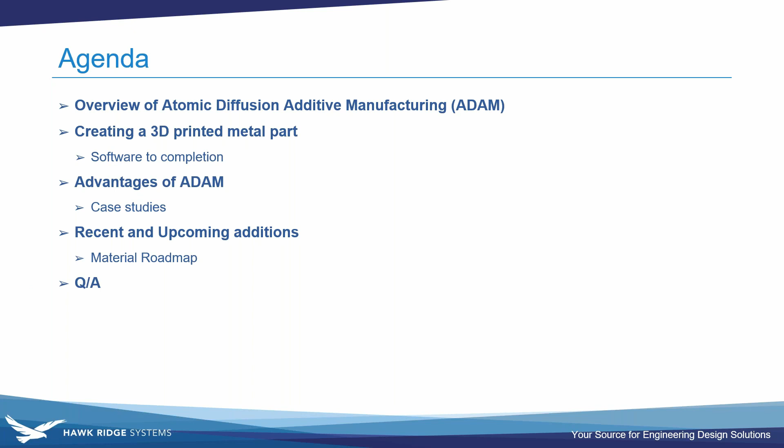So what is the ADAM process? Like with most modern manufacturing methods, you'll first work with your CAD software to design your part or assembly. Once you have your design, you'll export an STL file and upload it to the Markforged Eiger software. Since Eiger accepts STLs, you can continue using your CAD software of choice for the actual designing. Eiger is also really simple to use and lets you customize how your part will be printed. When your part is fully uploaded to Eiger, you can very easily forward it to your MetalX for printing.

The material that creates your part is a filament strand made up of metal powder bound in wax and plastic. If you're familiar with the layer-by-layer printing process of other Markforged printers or any other extrusion-based machine, the process here is nearly identical. If you're reading the print display card, you may notice a note about scaling and shrinking. We'll go over why parts shrink during the ADAM process in the next few slides, but because shrinkage does occur, Eiger scales parts automatically to account for it. The rate itself is about 20%. Since Eiger scales your parts without any needed input, all you or your designers have to worry about is designing your parts with their intended dimensions.

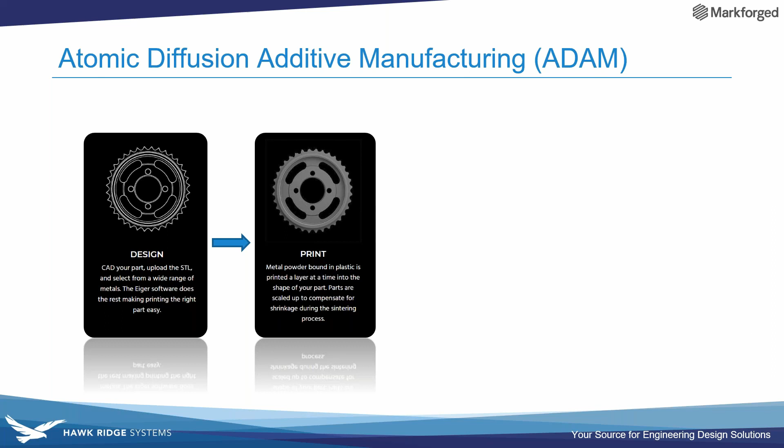Once your part is actually printed, it's referred to as a green state part. Green parts need to have some of that binder removed before they can be finalized, so they're washed in a liquid called Opteon SF79 to accomplish that. When a part has been washed, it moves to what's called the brown state and is ready to be sintered. Sintering will fuse the remaining metal powder together, and once that's done, you have your final part.

After the sintering process, parts are fully complete. If you want, you can post-process them with pretty much any method compatible with the underlying metal itself, so things such as shot peen, heat treating, anything you can think of in that regard.

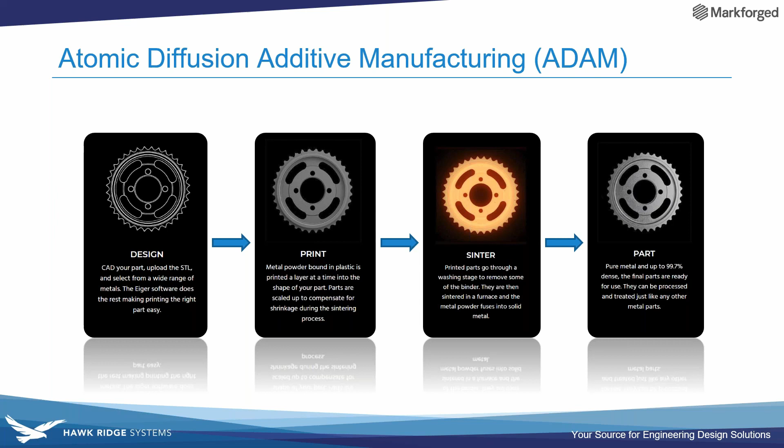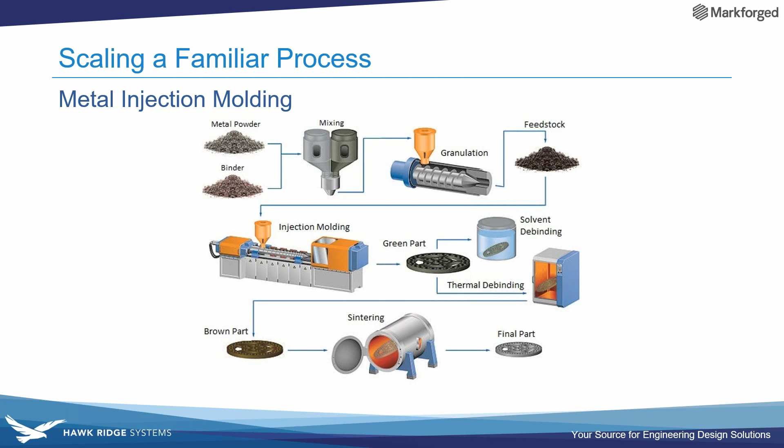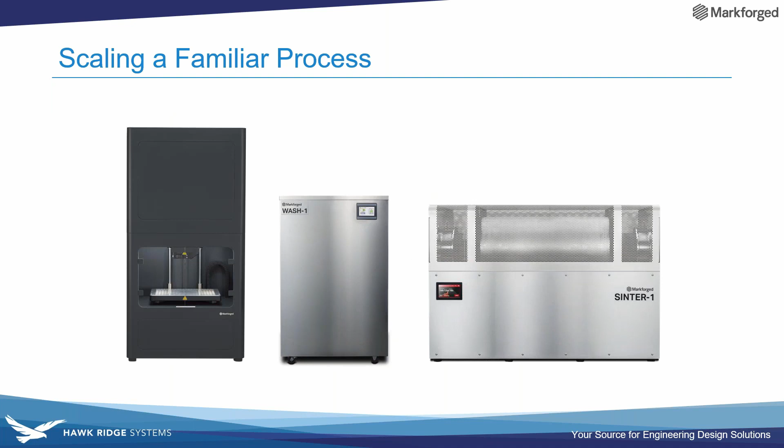While metal injection molding has been around and is extremely reliable and useful, it's typically only used for high volume production, and it's not usually accessible or affordable. So what Markforged did is take that existing concept, scale it, and use their knowledge from the composite side of 3D printing to refine it into the MetalX system that you see here.

So now that we have a baseline understanding of what ADAM is, let's run through the process of creating a 3D metal part. As I mentioned earlier, that process all starts with the software, which for this webinar today, we'll start with the Markforged Eiger software.

Eiger is an easy-to-use cloud-based solution that is based off of Google Chrome. That means as long as you have Chrome installed on your machine, you don't have to worry about installing or updating additional software, since updates to Eiger are automatically applied. Since Eiger is based in Google Chrome, that also means you can log into your account from anywhere that has access to that browser, which lets you see things like your printer status and remaining material remotely.

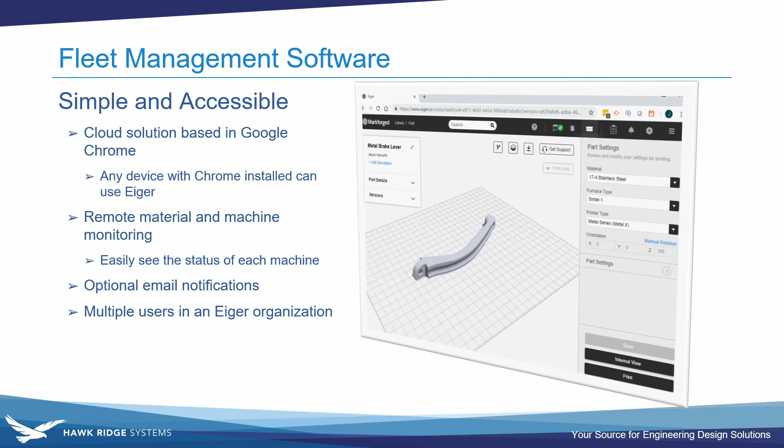Now, a big part of remotely managing your printers is being notified of any updates to your prints or printer status, which Eiger lets you enable via email if you want to. Lastly, Eiger lets you create organizations for multiple users, so anyone invited to your organization can help manage your printers, your part library, send parts to the printer, things like that.

So for anyone who hasn't had a chance to use Eiger before or seen a demo of it, we put together a quick video here to show just how easy it is to start a print with Eiger.

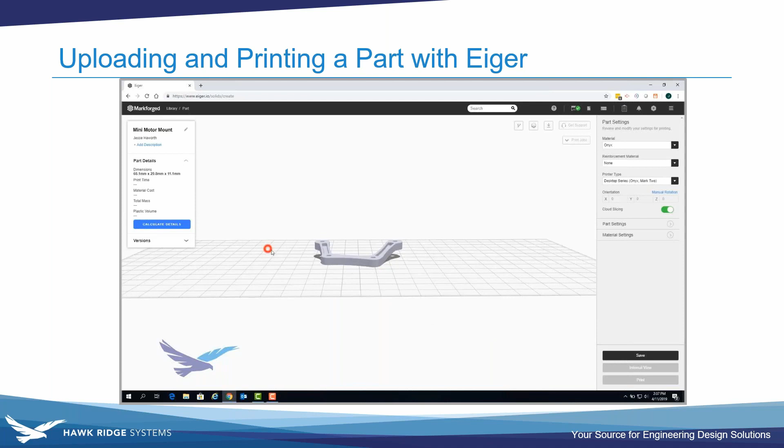As I said in my previous slide, it all starts with uploading an STL to your Eiger library, which we'll do here right now. Once your part has been imported, you are taken to what's called the part view, where you can see your part geometry. Navigating around the part view is super easy and typical of any software. I'm just clicking the left mouse button to navigate around, and you can do things like zoom in and out with the mouse wheel. Pretty standard stuff.

Once your part is here, you can select what type of material you want to print with. For this demo, we're changing this to stainless steel.

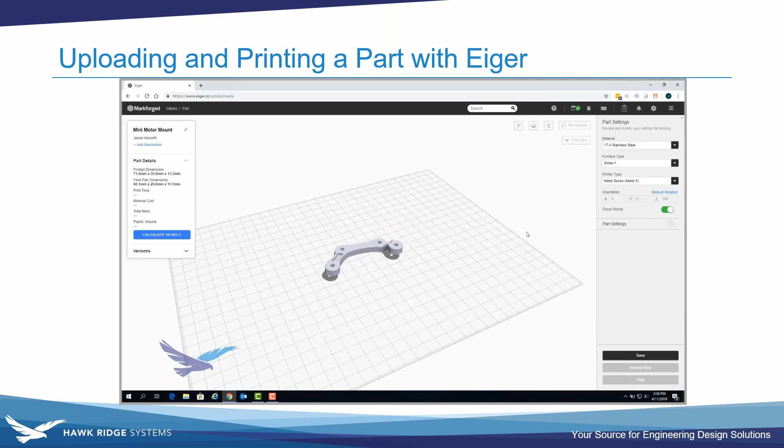By mousing over this part, you can see that some of the surfaces are highlighting in blue. If we click on one of those surfaces, it aligns that plane directly to the print bed. This makes orienting parts super simple, although we do have more precise control with the manual rotation feature over here to the right, where we can enable a gizmo and use that, or input specific degrees if we want to do it that way. With metal parts, we also have control of the scaling, import units, and layer height.

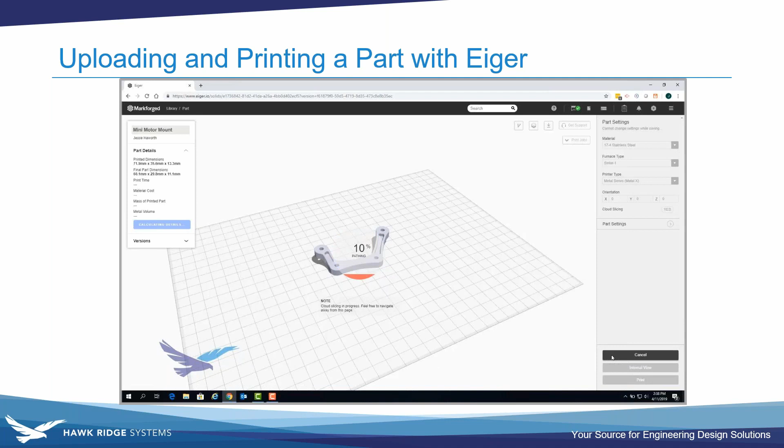Once you've played with those settings and have your desired settings, you can click Save, which will automatically slice the part and generate the printer toolpath, printer supports, anything that's needed for a successful print. We kept the slicing in real time just to show you how quick and painless it is for you guys.

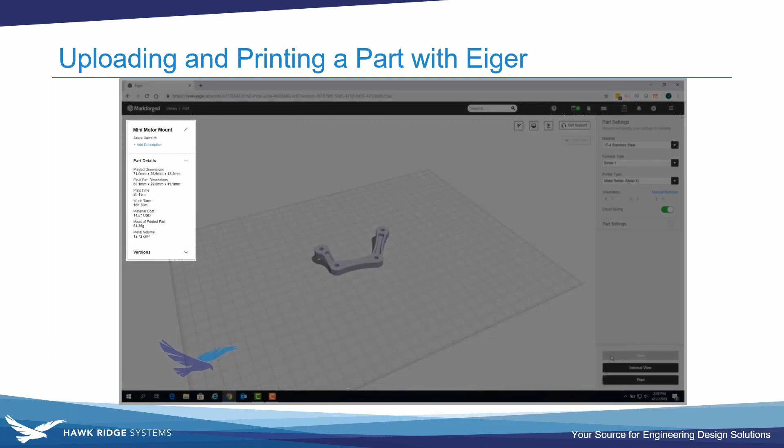When the part is fully sliced, you're able to see print details like how much material it will use, what the cost of that material might be, and what the print time is. And that kind of stuff is available even without a printer.

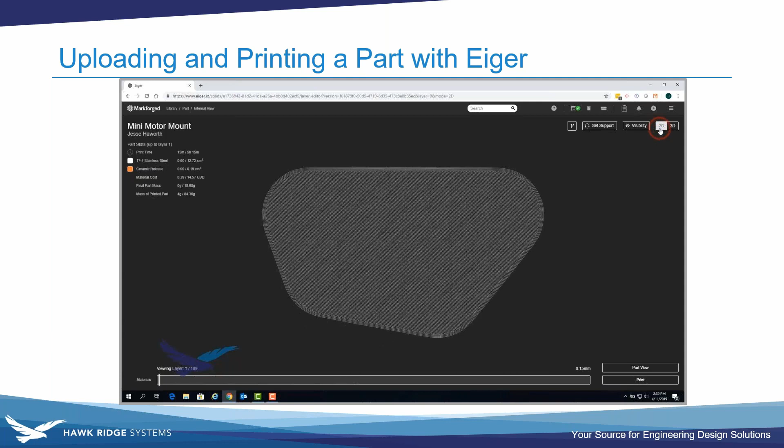So right now, the part would technically be completely ready to print, but if you want, you can take a look at the internal view, which we're accessing here, to get a better look at how the part will print. This comes in two forms: first, the overall transparent view, where you can see the whole part geometry, or a 2D layer by layer view, which we can use to see how the toolpath of each individual layer will be printed.

We can also click Print from here, which we'll do. That'll take us to the final preparation screen, where you can add more parts, select your printer if you have multiple printers, and save your build if you want to save that build for a future print.

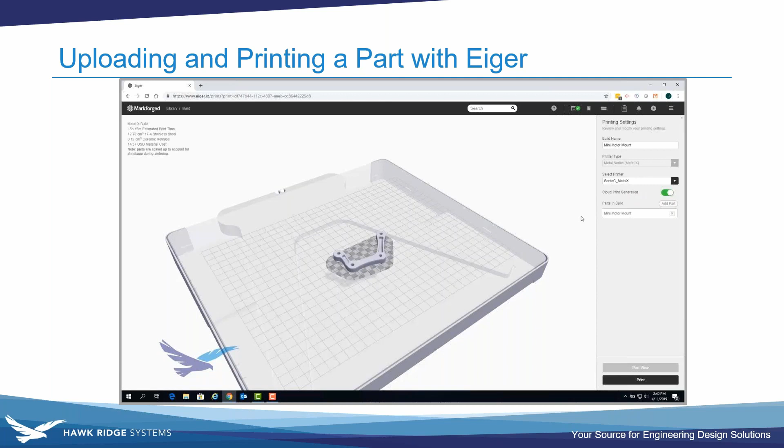Our printer was busy at the time of this demo, but if it wasn't, we could simply select that printer and click Print, and that would forward it to the printer. Since we actually saved this part, though, we can go back to our library at any point and print it easily if we wanted to.

So just as a quick overview, even taking our time to go over some of the features, that took less than 3 minutes to import a part and get it ready for printing. So like I said, it's a really, really easy software to use.

The structure and feature are separated by that ceramic release material, which is vaporized during the final sintering stage, which we'll go over. This prevents the metal supports from fusing to your geometry, so there's no need for wire EDM or any other post-processing method to remove supports from geometry.

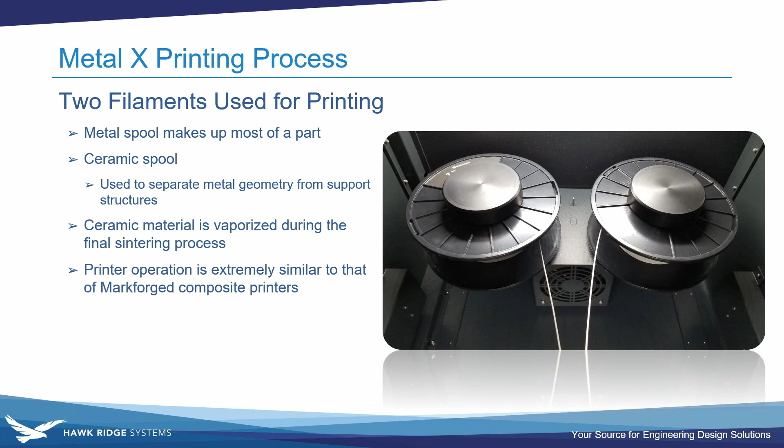The setup and use of the MetalX is extremely similar to that of the other Markforged systems. So if you've ever operated a Markforged printer or any other extrusion-based system, you'll already have at least a basic understanding of how the MetalX operates.

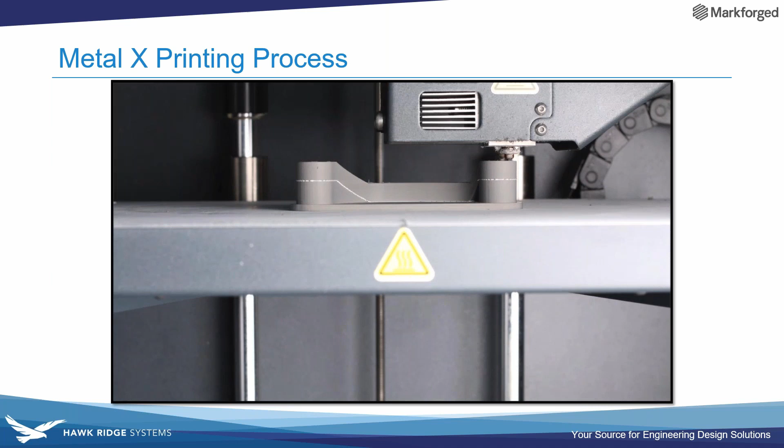For anyone not familiar with extrusion-based technology, here's a quick demonstration of how the MetalX builds parts. You can kind of see the white ceramic release material separating support structures from deep overhanging geometry. Just to be clear, this isn't how fast the print actually takes place - it's just a time-lapse video.

At this point, after the MetalX is printed, we have a completed green state part. This particular green state part is an example of a bottle opener that one of the Hawk Ridge Systems AEs designed. The wide feature you can see under the bottle opener geometry is known as the raft, which prints under each MetalX part.

The raft identifies what type of metal the part was printed with, but during the sintering stage it also helps shrink the part in a more uniform manner, meaning your geometry comes out accurately. The feature on the right-hand side of this bottle opener is another good example of how the ceramic release barrier prevents support structures from fusing with normal parts.

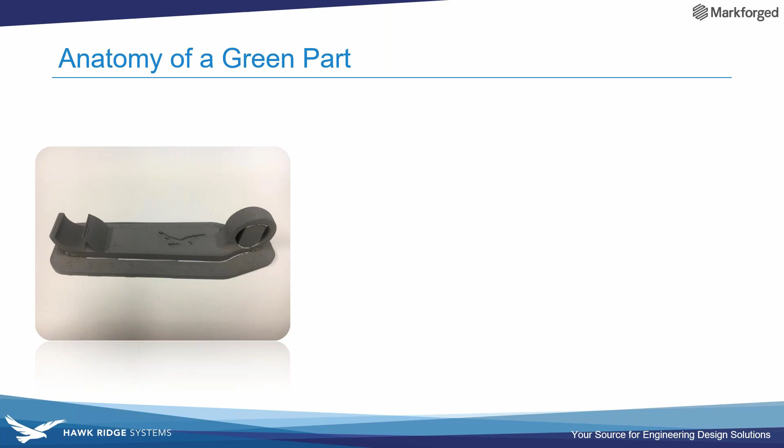Again, green parts are composed of powdered metal, wax, and polymer. At this stage, they have a consistency of about a tough clay, so they're fairly fragile. Here's a simple illustration of what a green part might look like at the molecular level.

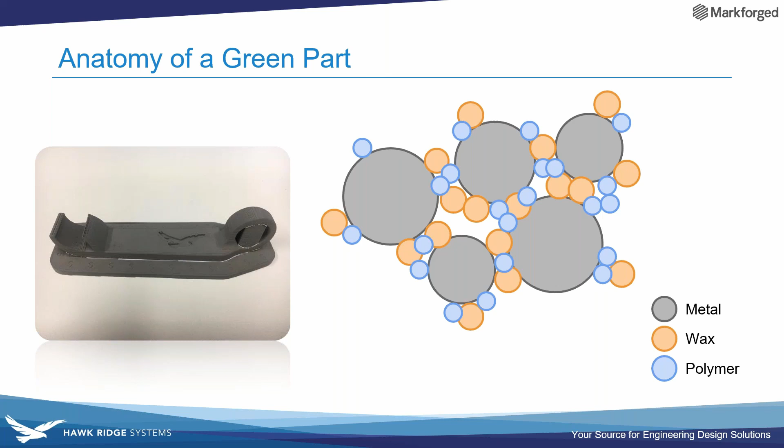When you have your green parts, it's time to move on to the washing stage. As I mentioned in an earlier slide, green parts are washed in Opteon SF79, which is essentially an industrial debinding fluid. The goal is for a large portion of those binding agents to be removed so they don't interfere with the sintering process.

You may have seen in that earlier Eiger video that Eiger will recommend wash times for each of your parts, so you'll know, in general, how long you need to wash your parts for.

Now, obviously that works for a single part, but what about multiple parts? A cool thing about the wash solution Markforged uses is that the parts cannot be overwashed. So if you were to start a wash cycle on a late Friday afternoon, you wouldn't need to come in on a weekend to remove those parts. The parts will not dissolve.

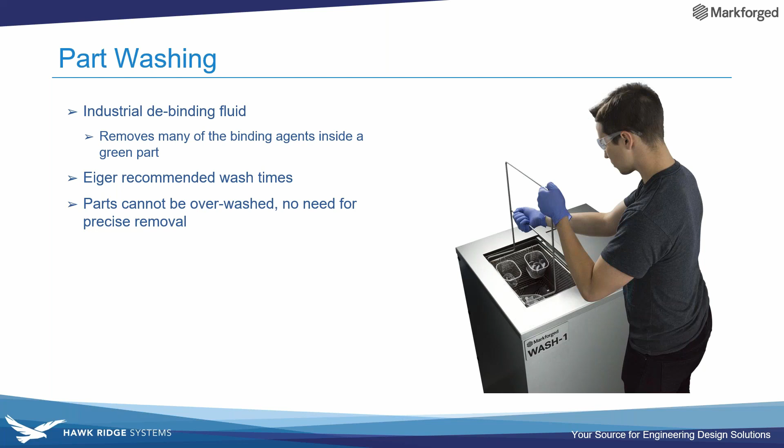When those parts are completely washed and ready for sintering, they enter what's called the brown state. Brown state parts are a bit more fragile than they were in the green state, but not to the point where they will fall apart with normal handling.

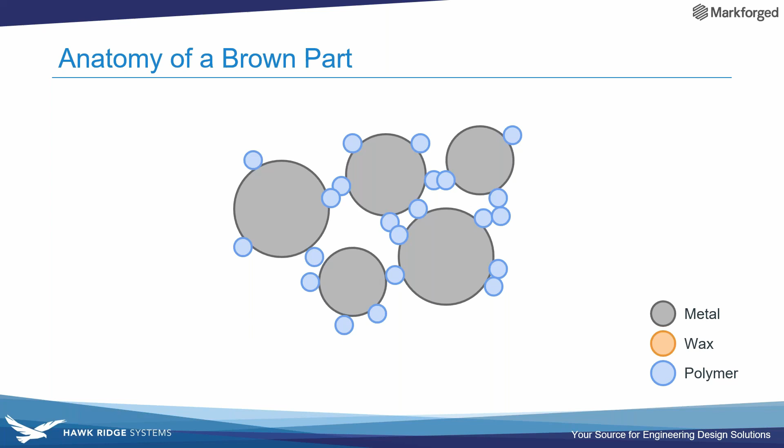On a molecular level, brown parts would look something like this. A very large portion of the binder has been washed out, but some still remains to hold that metal powder together. So when you've printed and washed your parts, the only thing left to do is sinter them. The main points of the sintering process are to burn out any remaining ceramic release material and binder, while also fusing together the remaining metal powder.

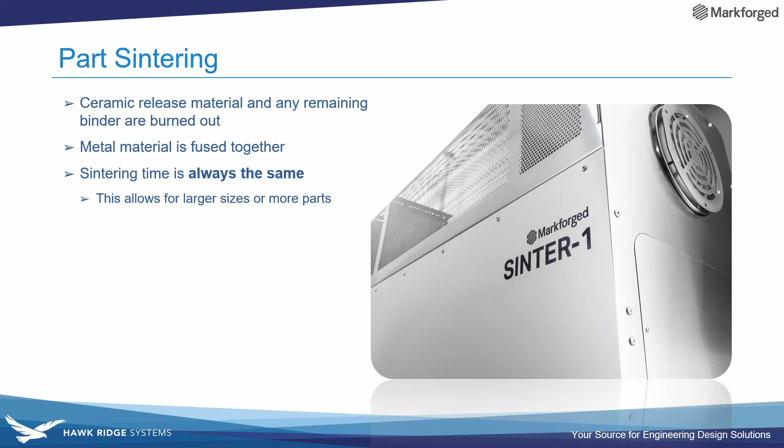One of the biggest positives of the Markforged sinter oven is that the sinter time profile is always the same, regardless of how many parts there are or how big they are. So as long as the parts can actually fit in the sinter, you will know exactly when they will finish, both by looking at the sinter UI and monitoring the sinter via Eiger.

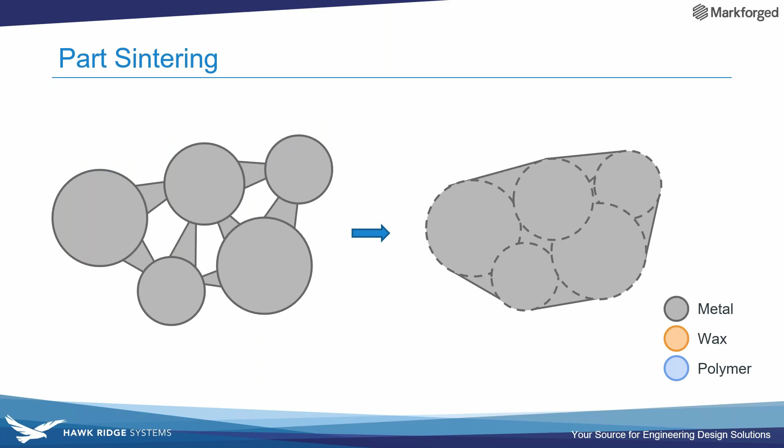Here's a real quick example of what is happening during sintering at a molecular level. As you can see, the remaining metal powder is fused and pulled together, resulting in your design geometry. The raft that I mentioned earlier helps to more accurately pull part geometry together as a whole, rather than each feature shrinking at an independent rate.

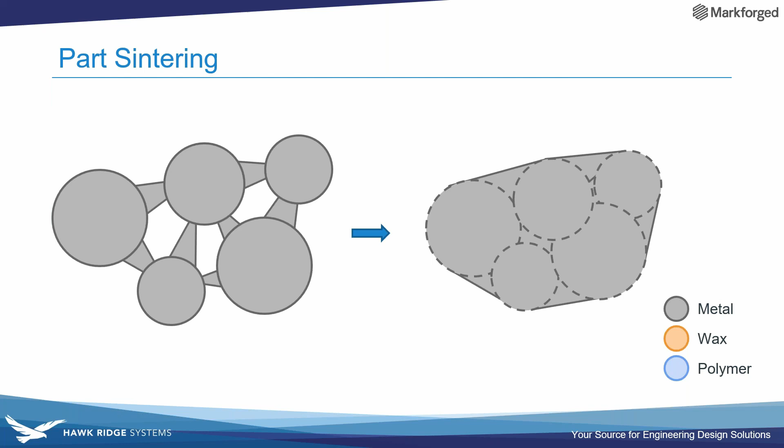Again, the shrinkage is accounted for by the Eiger software, so you don't need to worry about finding out exactly what the shrinkage rate will be. You just design your parts as they need to be designed.

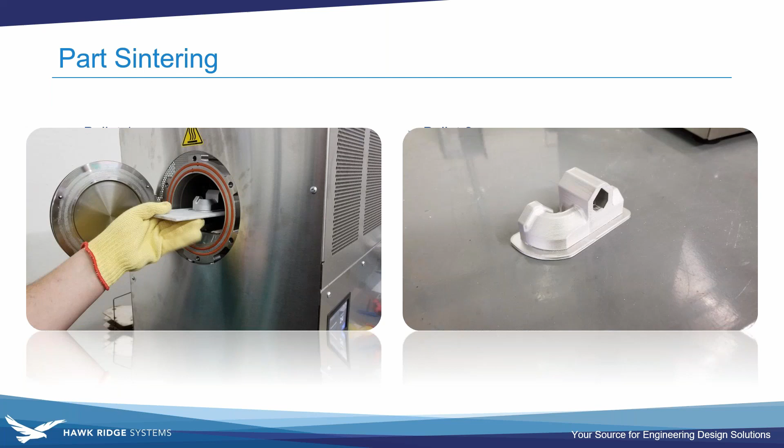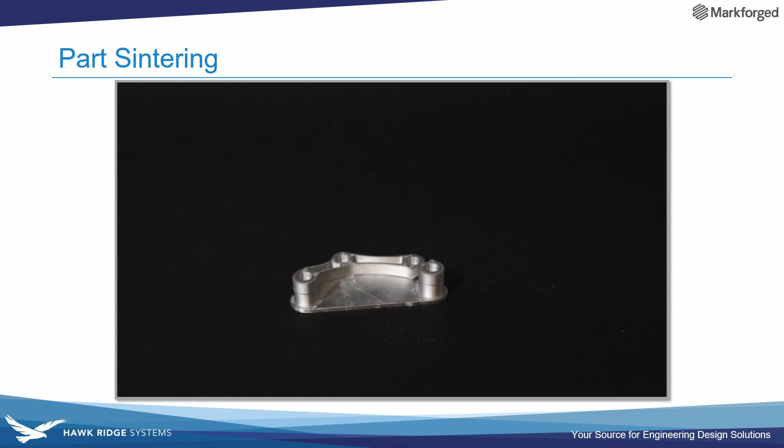As a quick example, here is a finalized version of the mini motor mount that we uploaded during our Eiger demonstration. Markforged put this video together to show a quick example of what removing a part from the raft might look like.

So when parts are pulled out of the sintering oven, you can immediately put them to use if you want. In terms of actual material properties, you can expect the metal itself to be up to 99.7% dense, while also having properties similar to wrought machined parts of the same metal. We won't go into too many details about materials today, but the data sheets on each available metal material are on the Markforged area of our Hawk Ridge Systems website, so feel free to take a look.

Now, again, because they have similar properties as machined parts, Markforged metal parts can be post-processed in any way that would be applicable to the base metal. I mentioned a few examples earlier, but any further machining action that you want can also be done.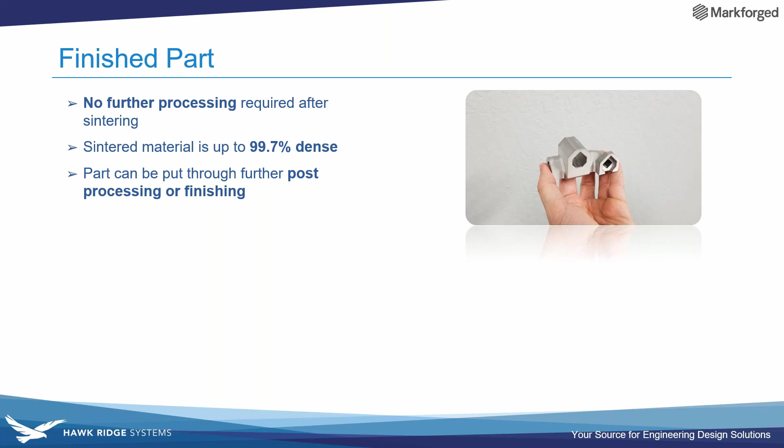As an added benefit, Markforged parts print with an infill pattern, making them lighter when compared to other similar parts. Infill like this would be impossible to produce with a powder-based or CNC solution.

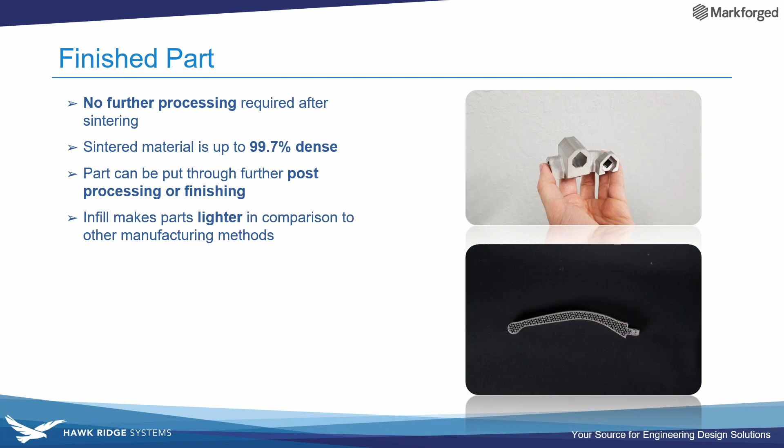So we've gone over the basics of how Markforged is able to create metal parts, but what do you stand to gain from using the MetalX? Well, as we've already gone over, the ADAM process is a scaled-down version of existing techniques. So as a manufacturing method, it's already been proven to work. There's no theory crafting, no guesswork, which is a huge positive.

Like we showed in the last slide, infill patterns can be created with the Metal X, leading to lighter parts that use less material. So if you were pushing a material to its limits, a solid part may be theoretically stronger, but a huge portion of applications don't really require a solid part. So the added benefits when compared to the time and money investments are not usually worth it.

So even though the solution as a whole is scaled down, the Eiger software lets you run multiple printers or sinters in parallel, letting you scale your production as much as you want. The Markforged print farm that I just mentioned, the one that's only operated by a single person, consists of several dozen printers, both from the composite and metal side of things, and Eiger lets them all be managed easily and remotely if needed.

Then, of course, there are the benefits of simply removing the lead time and production costs associated with sending a part out to a machine shop. The time-saving potential is really big, especially in low-volume requests, which typically tend to get backlogged due to priority. Instead of waiting weeks for a part to get machined and sent back to you, the part could be in your hand within a few days. This lets you obviously test and iterate more because you don't have to wait for your part to be manufactured at a shop again after a simple change.

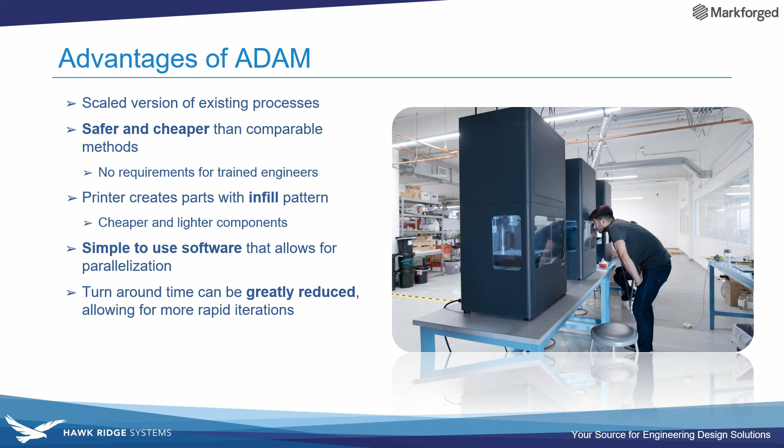Now, all of those benefits don't really mean anything if the printer can't create parts that are accurate and do that reliably over multiple runs. So just like with their composite machines, the Metal X is able to do both of those things easily.

For an example, let's take a quick look at these example metal ball joints. Each of these two components, the top and bottom, are printed on separate Metal X systems and are able to thread together with absolutely no post-processing other than a bit of lapping compound on the threads.

Markforged uses these as demo pieces, so as you can imagine, for a company that has a global footprint, quite a few of these are printed at a fairly consistent rate. For accuracy itself, you can obviously expect to get near net shape with parts printed on the Metal X. Tolerances typically range about plus or minus 125 microns, which in Imperial is about 5 thou. Though Markforged does get accuracy in some parts down to 2 thou.

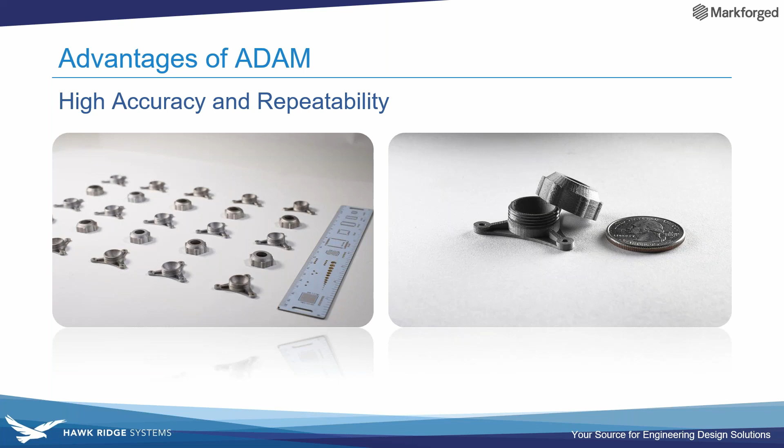Now, just like with all manufacturing methods, ADAM has applications that are better fits for the technology and applications that aren't. So here are some good examples of geometry and applications that are well suited for the ADAM process. So this is going to be hardware such as jigs, fixtures, jaws, and anything else that is typically associated with lower volume and high lead times. These are all excellent candidates.

Again, with quick turnaround times, you're obviously able to iterate and test these designs more than you normally would. You can also print as few or many as you want, rather than ordering a lot from a machine shop to drive the cost down. This obviously has the added benefit of inventory management.

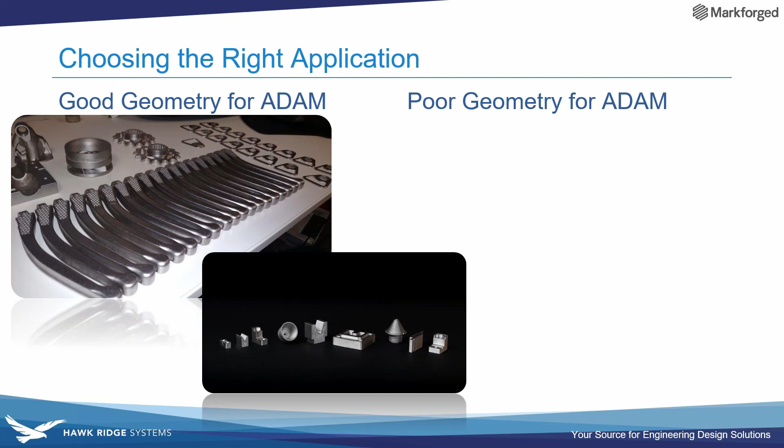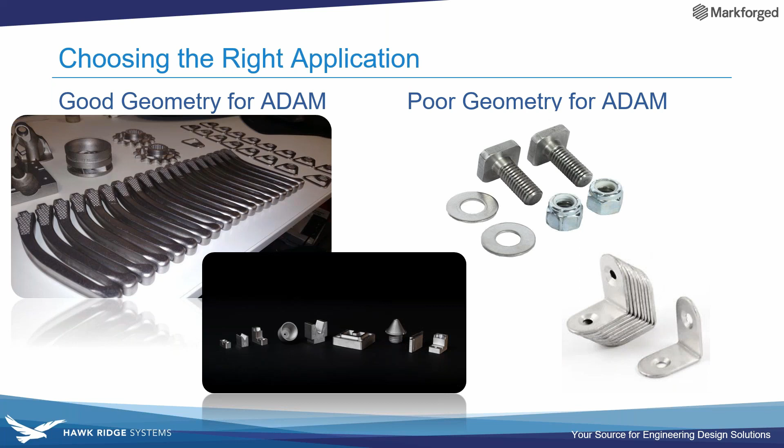Now, what the Metal X will not do is replace components that are easily available off the shelf. This is stuff like sheet metal brackets, bolts, nuts, or dowel pins. Now, as you saw in the last slide, this doesn't necessarily mean that the Metal X can't create these things, so it obviously can print threads, but anything small that can be bought cheaply and in really large amounts from your local hardware store is simply not a good fit for the technology.

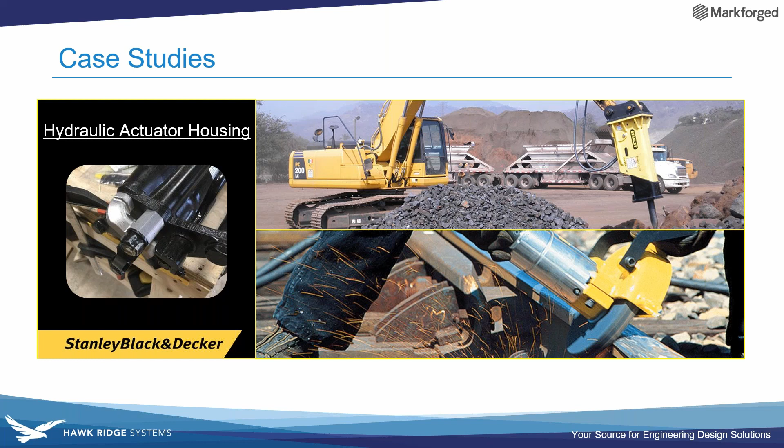Okay, so it's usually helpful to see some real-world examples of the technology in use. So let's take a look at a few case studies that Markforged has helped with. The first one will be for a Metal X printed hydraulic actuator housing that is used by Stanley Black & Decker. The silver component on the left-hand side of this slide is the printed component itself. Let's take a bit of a detour and first define what this part is and what it does. On the left-hand side, you'll see the post driver that the actuator is a part of. Pictured in blue on the right, the housing actuator transfers trigger pull forces through a group of ball bearings.

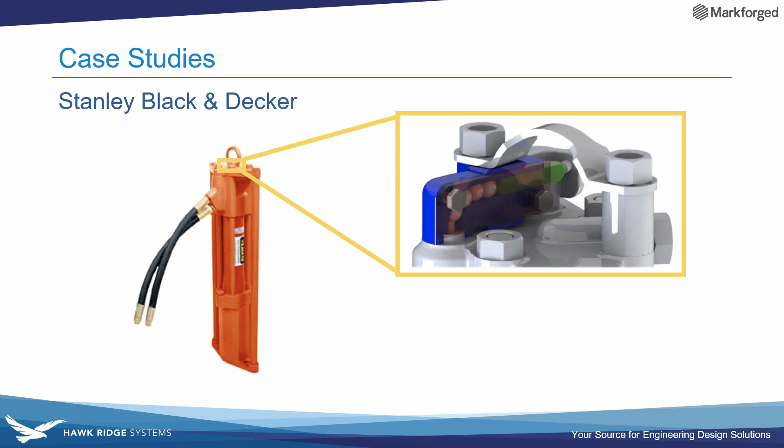Stanley Black & Decker only needed a few dozen of these per year as replacements, so their choice was either send the order out for only a few at a time, meaning that the lead time would be high, or pre-order them in higher amounts, meaning that they had to use up inventory space to store them. Based on just those two things, this part was already an excellent candidate for the Metal X.

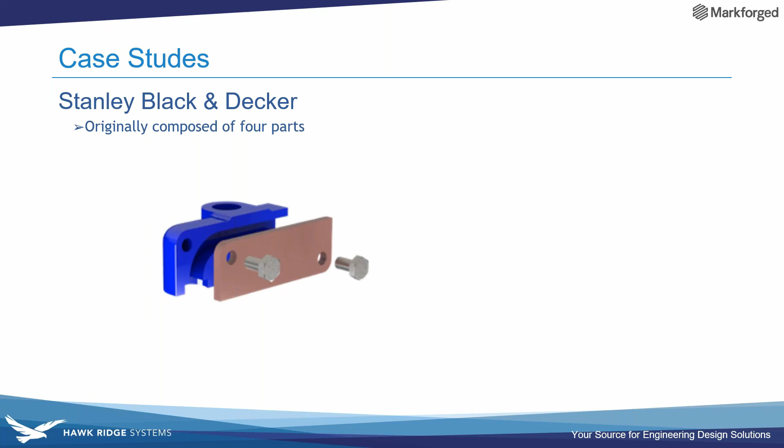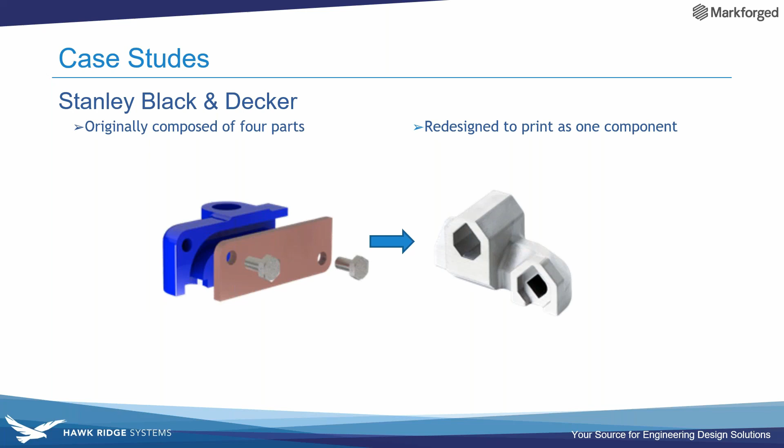For how this part was made, the actuator housing was originally made up of 4 parts. The component in blue on the left was a cast part, with the reddish component being a laser cut cover. To better take advantage of the Metal X, engineers at Stanley Black & Decker redesigned the assembly into one part while also modifying the through channels into teardrop and diamond shapes so that they did not need to print with support material. If anyone here keeps up with our blog, you may recognize this as the first part that we printed with our Metal X system. With cost and time-saving metrics in the 90s for just a single part for Stanley Black & Decker, I think the results kind of speak for themselves.

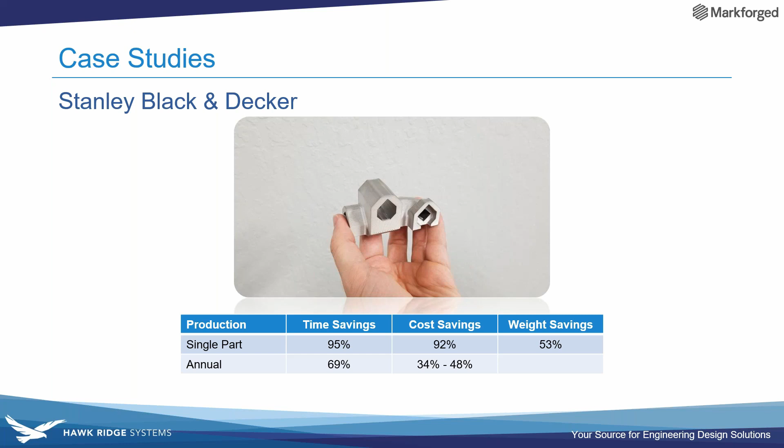Now, obviously, the part needed to be tested, and Stanley Black & Decker actually had to use methods beyond what they would normally test with to get the part even near a failure state. So because of how well this part performed for them and how much it actually saved them, Stanley currently uses this part in production environments.

Now let's move on to our second case study, which is Dixon Valve. Some of you might already be familiar with Dixon Valve and the fact that they already use Markforged composite printers to enhance their capabilities. You can easily see a Markforged printed composite soft jaw and some grippers in the pictures on the right and center of this slide. However, there are just some applications that plastics or composites aren't able to tackle, such as when they're pressed against sharp threads with high force. This is where the Metal X came in for Dixon, with the Dixon gripper jaws that we'll take a look at. You can see them in the picture on the left-hand side.

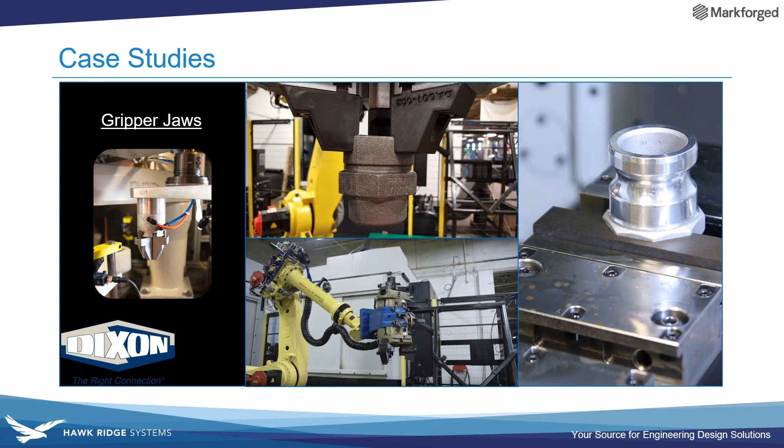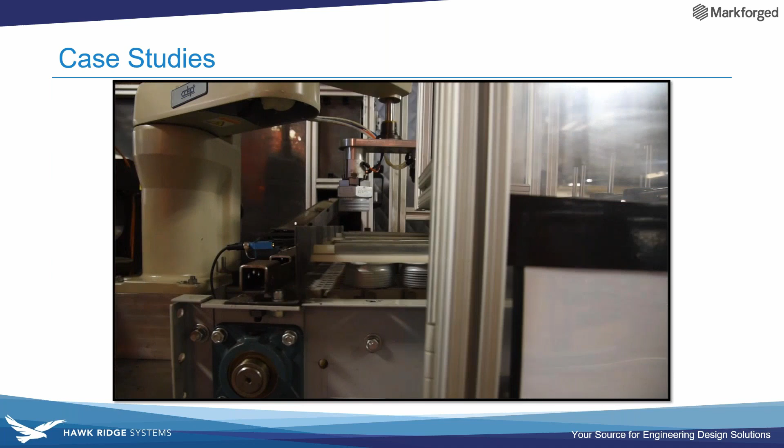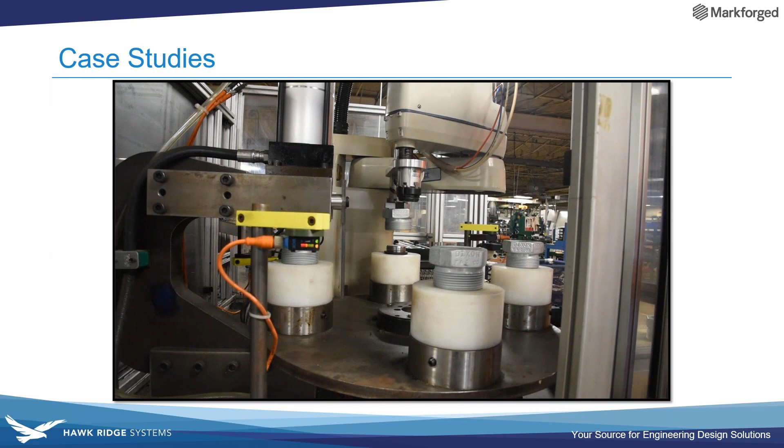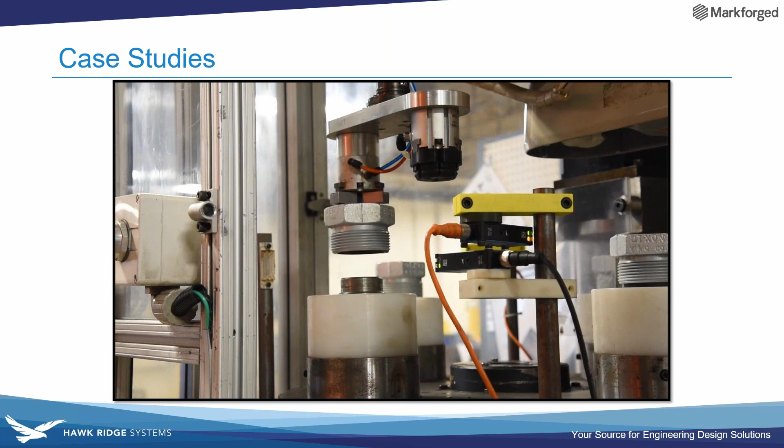Here's a real quick video of the gripper jaws in action. As you can see, the jaws hold a coupling from their inner threads, moving them to an assembly fixture. This particular coupling presses a polymer crush washer, and once the task is complete, the jaws move these couplings to a tray for packaging and shipping. A cool note here is that the arm is only moving at about 30% speed in this particular video, and safety doors have to be closed when they really get it up to speed.

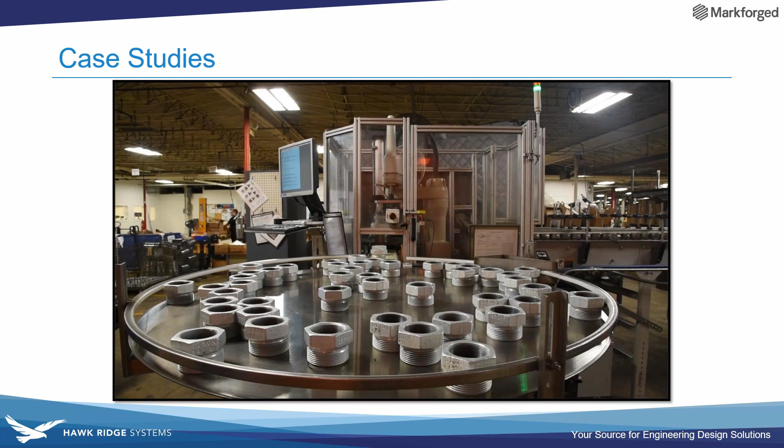So we've covered what the technology is and some of the things you can do with it. So now let's move on to some recent additions and some upcoming materials as well. So the first thing we'll cover is the recent release of H13 tool steel. Here's some quick pictures of prints done with the H13 material. Because of how hard and tough it is, this type of tool steel is used a lot in tooling such as punches and forming tools, but also things such as injection molds.

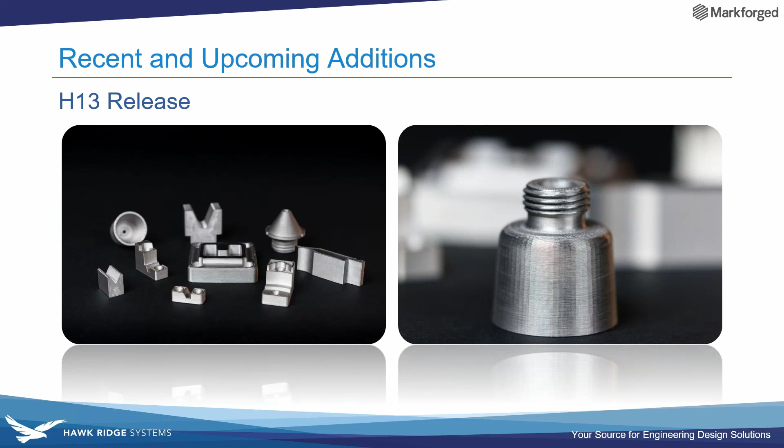The really cool thing here is that switching between different materials on the Metal-X is really easy. All you have to do is load your desired filament type, make sure that Eiger has the correct material set, and print your part. So let's cover one of the more exciting new additions, which is the release of the 50 micron layer height alpha test. I think that for this one, pictures are better than words, so let's take a look at a test that was done at 50 micron height.

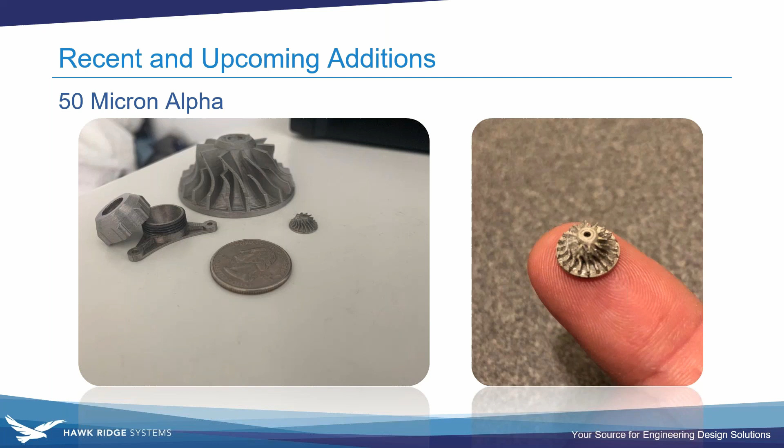So like you can see here, 50 micron layers really let you get those finer features to come out nicely. Those of you who are familiar with the industrial series of Markforged composite printers already know that the X series can print Onyx at 50 microns, so the ability to do the same with metal is really cool. Last thing we'll cover here is the upcoming materials roadmap. Like I said, H13 tool steel was just released, so along with stainless steel, there are 2 fully available materials. So let's take a look at what you can expect coming forward.

An upcoming material on the roadmap is Inconel 625, which is a metal that's usually known for its high chemical and heat resistance. That means it's used fairly often in the aerospace industry. Next on the upcoming materials list are A2 and D2 tool steels. These are hardened and are excellent for things like punches, dies, and forming tools. A2 is usually tougher, while D2 often has a higher abrasion resistance.

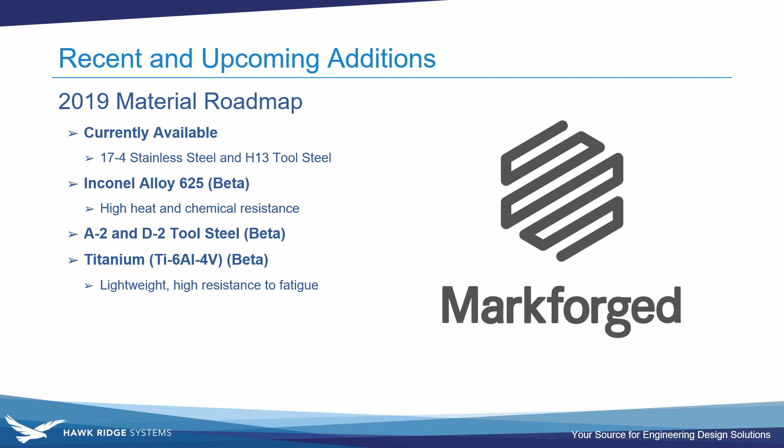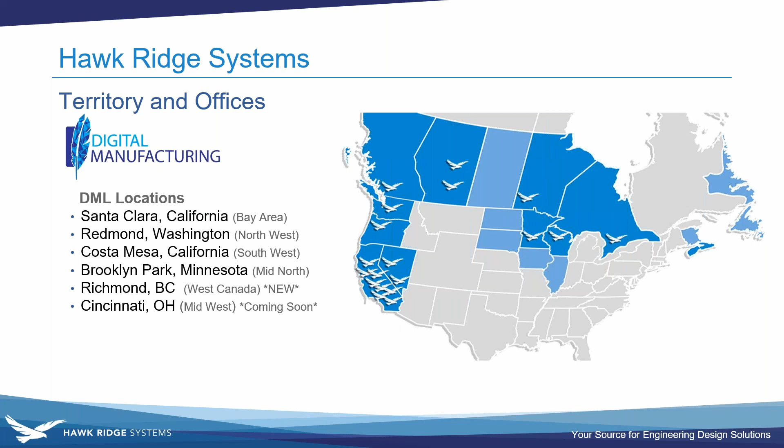Our first question comes from Jim, and he is asking if the sintered parts can be heat treated with proper alloy. Yes, and in fact, if you look at the data sheets for the two materials that are available, which are 17-4 stainless and H13 tool steel, those are available on our website and the Markforged website. They should have some statistics on the strength of heat-treated parts after they've come out of the sinter oven.

All right, second question is from Eric Albert, and he wanted to know if the support structures stay with the part through sintering. Yes, the support structures do stay with the part during the sintering process, but because of that second filament strand, the ceramic release barrier, they don't actually fuse to your geometry. They're very easily separated. He had a second part to his question in regards to how about hollow and tubular parts?

Essentially, if you have a hollow part, so something where you actually have a cavity designed, if it needs support structures, so if you have something that's directly overhanging the print bed or anything near less than a 45-degree angle, the Markforged printer will put supports just to make sure it doesn't droop. So something like a through channel where you can access that is beneficial. If you don't have any ability to access that, like Stanley Black & Decker did, you just redesign your channel or cavity to be maybe a diamond shape, a teardrop shape, something like that that doesn't need supports. Great. Next question is from Jeff Collins.